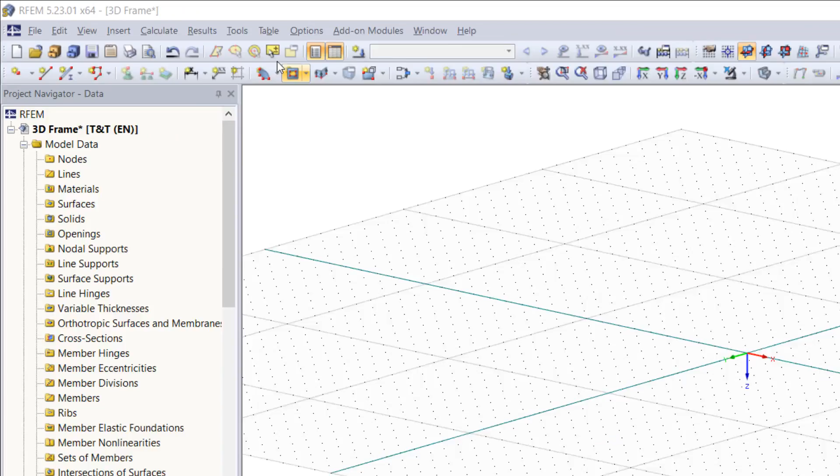In this clip, we are starting with the first tip, using model generators during your modeling process. To access the dialog we can find in the menu Tools, Generate Model Members or Surfaces, and as you can see we have a lot of options for several structure generators, starting here from basic 2D models like 2D frames or 2D trusses to more complex 3D models like 3D frames and also trusses.

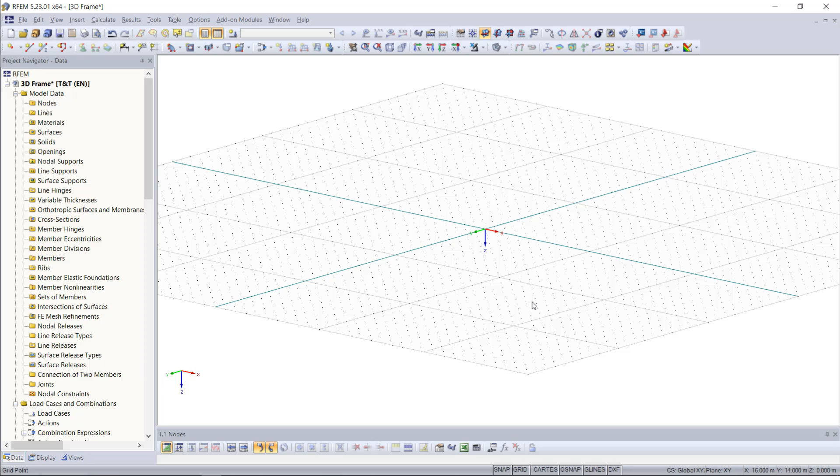We can even find stairs and also complementary elements like bracing and cells for stiffening a structure. As an example, we are going to create a 3D frame with bracings only using the model generator. And once again, go up to the menu Tools and choose Generate Model Members 3D Frame. Then, as you can see, a new dialog box appears.

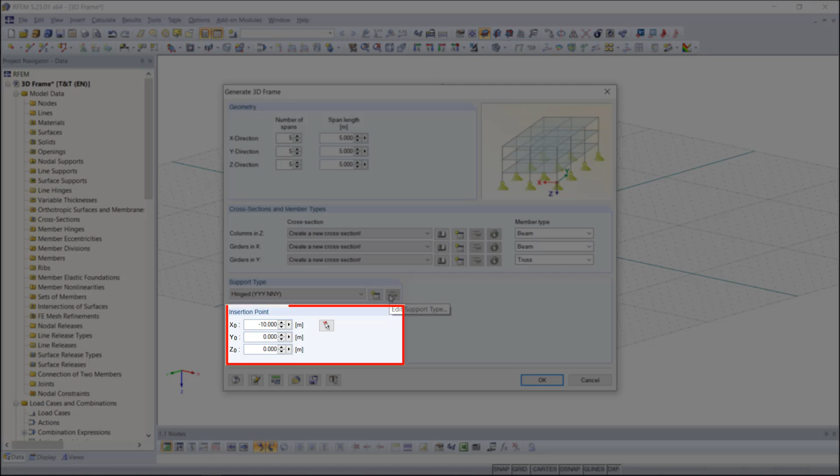And here we have to enter all parameters like the geometric information for our frame, cross-section and member type, support type, and we can also choose the coordinates where our structure should be inserted. And we are starting with the geometry. The number of spans, we can set this as 3 in X direction, 2 in Y direction, and 1 in Z direction. For our span lengths, we choose 5 in X direction, for the Y direction 4, and maybe 3 for the Z direction.

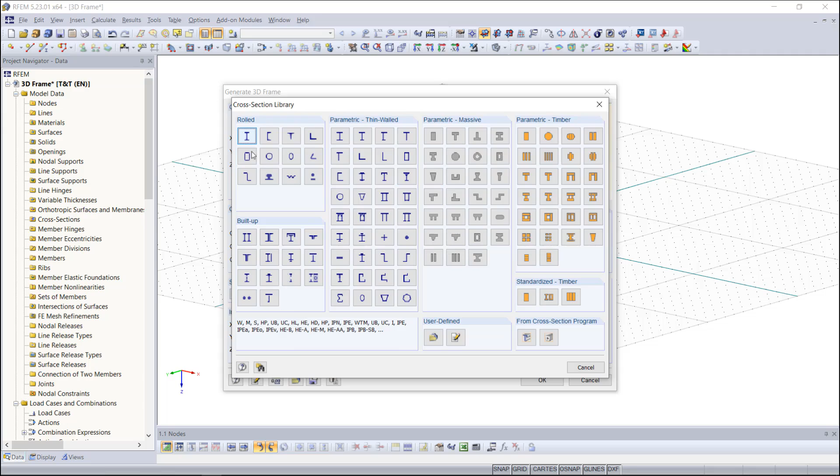Moving on to the cross-section and member types, the program is telling us here that we need to create a new cross-section. We will start with the columns, so for this, open up the cross-section library. And you can see here that we have many different cross-section types. So for the columns, we will begin with the rolled sections, and in particular the IPE 300.

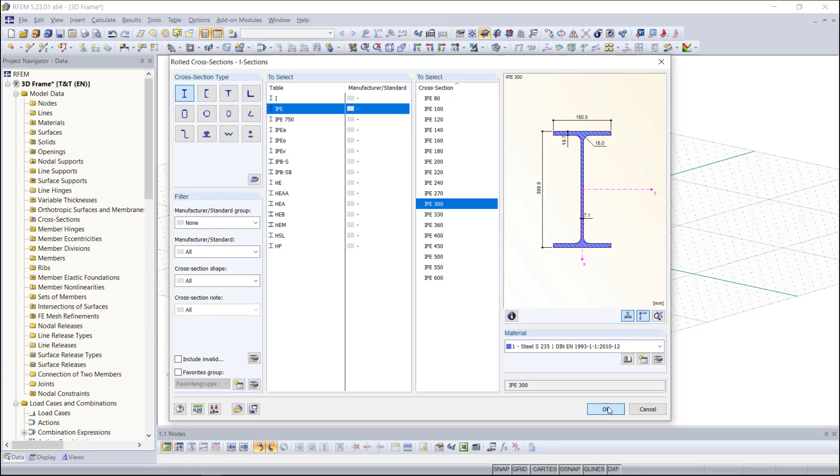Regarding material, we can import it from the material library, and we will choose steel, for instance, S235 based on the European standard. Then we click OK. And we click OK once again. Now, as you can see, the same cross sections are set for all of the members, but for the other members, I actually want different cross section types.

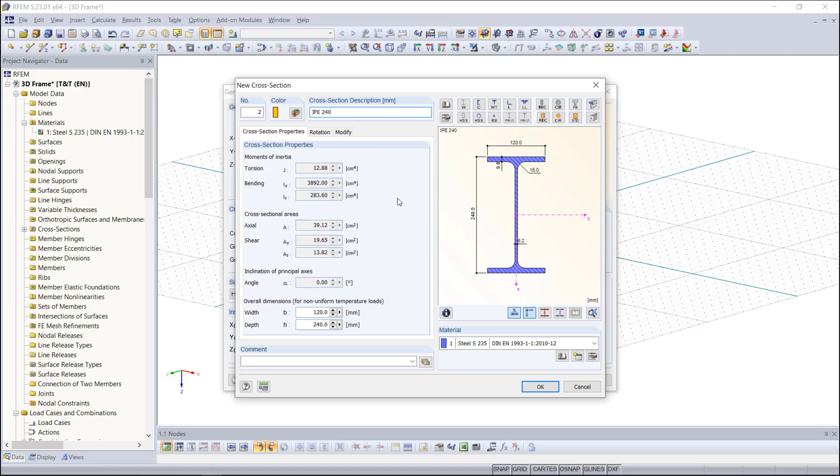So for this, if you already know which kind of cross section you want to have, it's quicker to click on the Create a New Cross Section symbol and simply enter the name of the cross section. As you can see, RFEM automatically imports the properties out of the library. We enter OK to finish our selection. Same procedure once again for the members in Y direction. Enter the name of the cross section and click OK.

Under member type, we have several options using the drop-down menu like the basic beam members, but for our frame, also a truss member, which you can see the program automatically inputs here. A truss is going to set a moment release, so we are only transferring axial and shear forces.

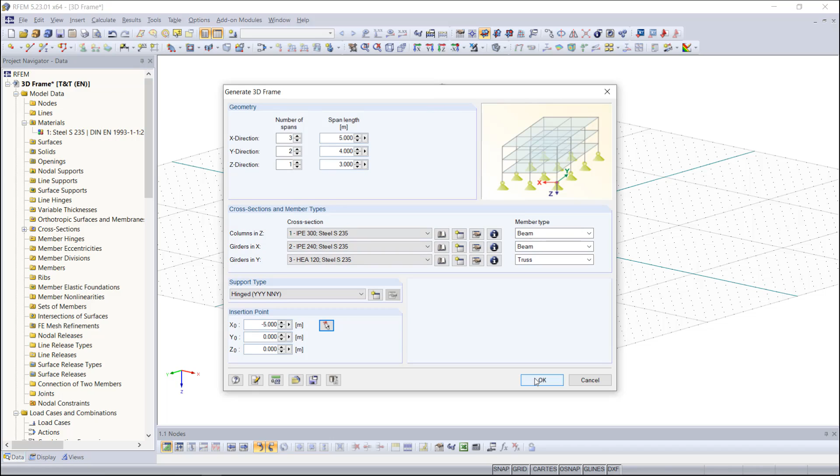As the next step, we can also change our support types for the structure by the drop-down menu or creating a new support type. But for our frame, we just leave the hinge supports. In addition, we can specify where the structure should be inserted, and we choose maybe this point. By entering OK, our frame is simply generated.

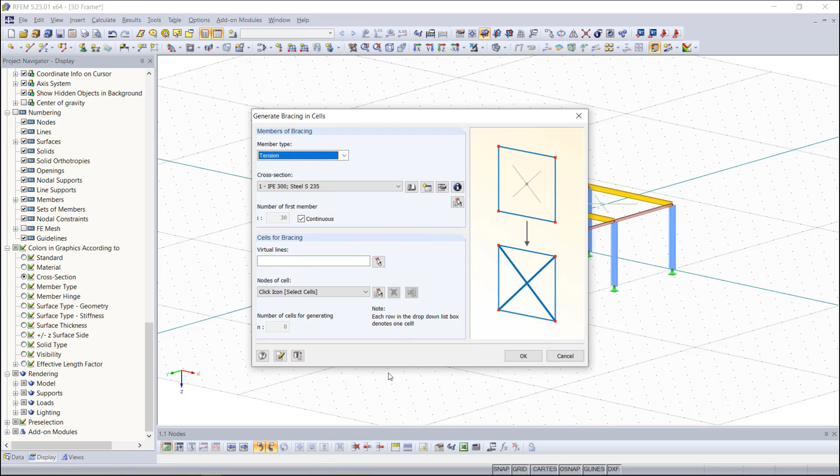So, as I've already mentioned, we can also create bracings. And once again, go up to the menu Tools and then choose Generate Model Members. Down here, we can find bracing in cells. Then a new dialog box opens, and as member type we choose tension as it's set on default. Then we select the cross-section type and enter OK.

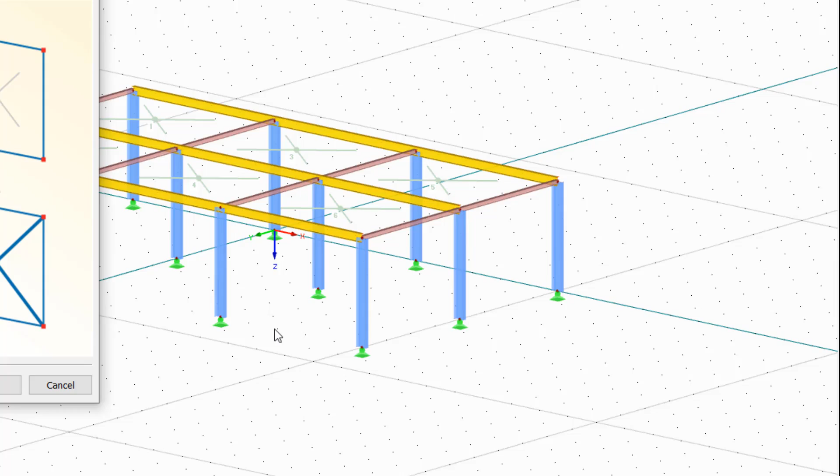As a next step, we can choose those cells where we want to add a bracing. And as you can see, RFEM automatically recognizes closed ones. But for not completely closed ones like this one, we have to first create a virtual line in order to use it as a bracing cell. Once done, we click OK, and then we choose the cells, for example these ones. And then by entering OK, our bracings in the chosen cells are quickly created.